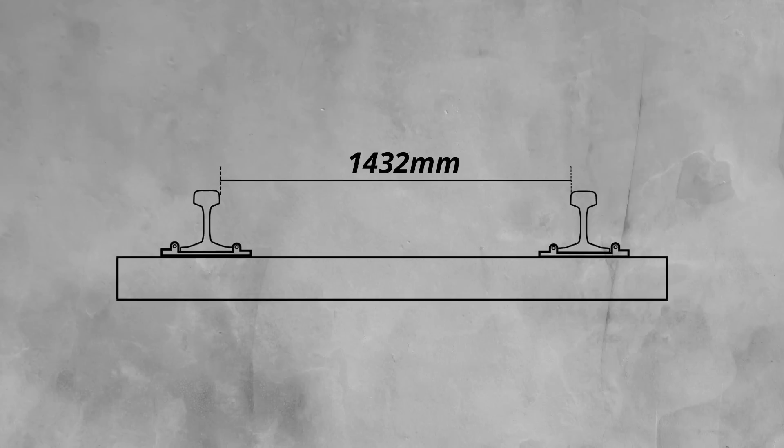The standard rail gauge in the UK is 1432mm in plain line, where the rails are inclined, and 1435mm where the rails are vertical, such as in certain types of S&C. This is also common throughout Western Europe and the US.

Measurements for gauge, whether taken by hand using track gauges or by train-borne measuring equipment, are taken at 14mm below the crown of the railhead.

So why is correct track gauge important? First and foremost, correct gauge is important to ensure trains stay on the tracks. Both tight, when the rails are too close together, and wide gauge can cause trains to derail. For wide gauge, the wheel will simply fall off the rails.

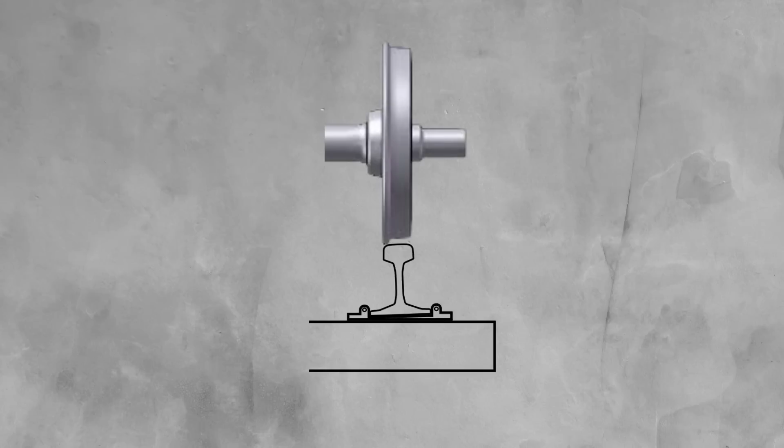When the gauge is too tight, it can cause a number of issues. These include wheel flange climbing, where the flange starts to rub against the rail or catches it, which can cause the train to lift and then derail.

On curves, trains tend to move slightly off centre, so that the wheel's semi-conical shape can allow the outer wheel to travel the longer distance. Tight gauge stops this from occurring, causing instability and possibly overturning the train.

Increased lateral forces, caused by the restriction on the train's natural movement by tight gauge, also leads to increased wear on components, such as the rails. This can weaken them over time, leading to failures.

Aside from the immediate concerns of keeping the trains on the rails, correct track gauge also contributes to the stability of the train. Track geometry is designed with correct gauge in mind, so for optimal rail-wheel interface, the gauge needs to be correct. This gives trains, particularly at high speed travelling around curves, the optimum interaction between the rail and the wheel, giving the highest level of stability if the track design is correct.

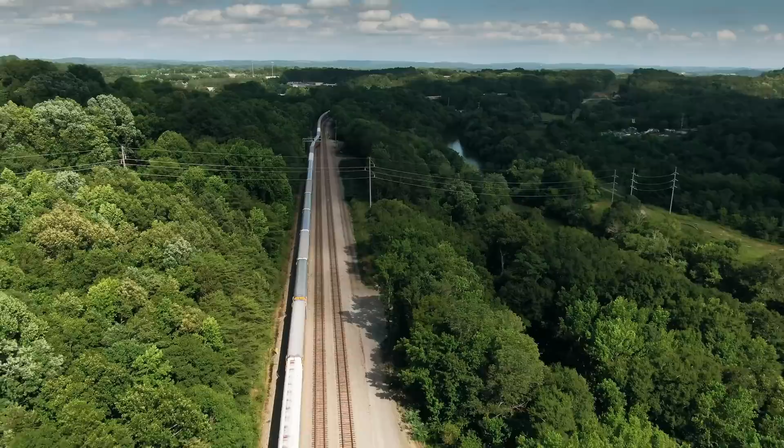This also leads on to ride quality. Similarly to track geometry, trains themselves, and importantly their suspension systems, are designed to provide a comfortable ride for passengers and to protect freight from damage. The correct track gauge is important for effective functioning of these suspension systems. Deviation from the correct track gauge can lead to discomfort for passengers, excessive vibrations, and potential damage.

There is also efficiency. As with any system, when it is operating as designed, it is at its most effective or efficient. At the correct gauge, the resistance to the movement of train wheels, known as rolling resistance, is lowest. This low level of friction reduces the energy required to move the train, thereby reducing the fuel or energy consumption of the train. In a similar vein, the track components will also be subject to less wear and tear, so less prone to failure or requiring less maintenance, which leads to reduced costs.

Gauge faults may seem more minor compared to other track faults, such as twist, but they do have a larger effect than most people appreciate.

So what causes them? Gauge faults, or gauge variation as it's sometimes known, normally have a root cause in the failure of a component. Top of the list are fastenings, base plates or screws. The main function of these components is to maintain the gauge, so naturally, when they stop functioning correctly, the gauge deteriorates. The types of failure tend to be grouped depending on the sleeper type.

On wooden sleepers, the screws securing the base plates to the sleeper are a particular weak point.

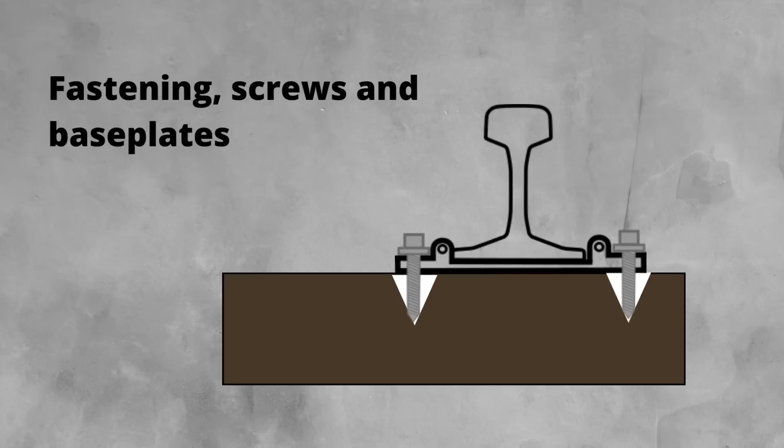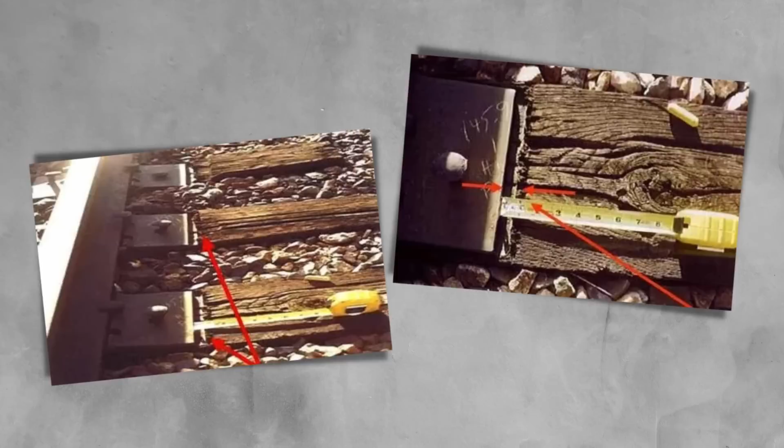The lateral forces of passing trains can cause these holes to elongate, allowing the base plate to move or shuffle. This can be visible on the sleeper, as the base plate movement wears on the wood. The screws can also shear, a more likely failure on hardwood sleepers, given the tougher material doesn't allow the holes to deform. This can be a real issue because to the track patroller walking through, it might not be obvious that there is an issue.

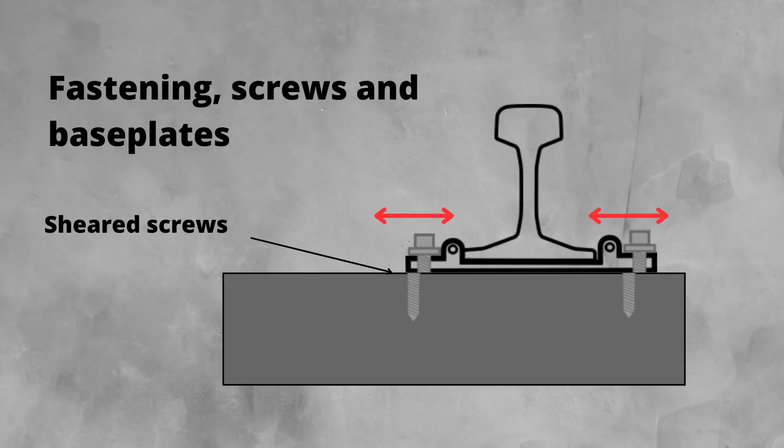It would only be apparent when a train passes, when the track system is under load. This is known as a dynamic gauge fault, where the train's force spreads the rails. A static fault can be seen and measured without the presence of a train.

Sleepers that have failed or are rotten can also be the cause of the issue, as they are unable to restrain the base plate and thus the rail. Typically, a number of consecutive sleepers need to be affected to allow gauge variation to occur.

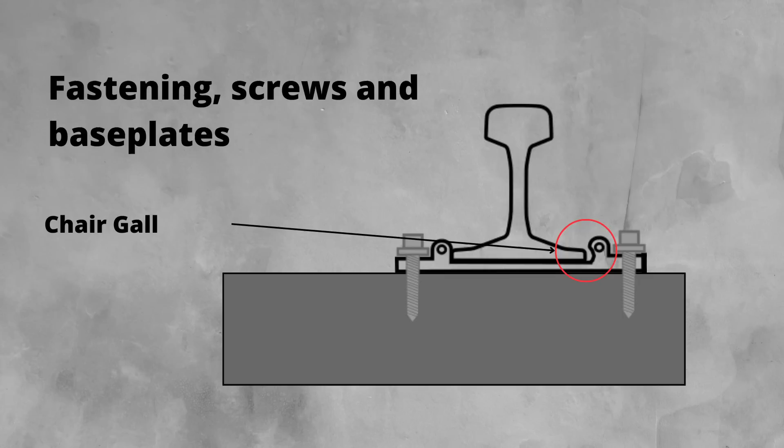Moving above the sleeper to the base plate, wear in this area can create what is known as chair gall. This is when the inside of the base plate surface next to the rail becomes worn, normally from movement. The additional space between the rail and the base plate allows the rail to move outward, increasing the gauge. Left unchecked, it can also lead to the housing being worn right through.

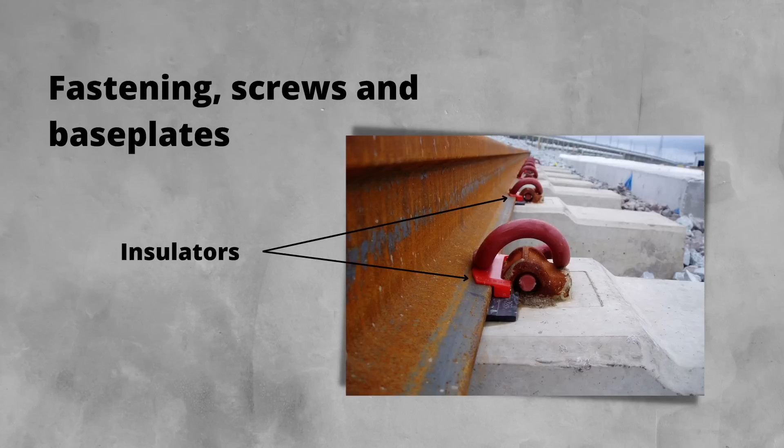Next, we get onto clips and insulators. Again, if these components become worn or are not in place, the rail can move outwards. This is most commonly found on tight radius curves where the lateral forces are high.

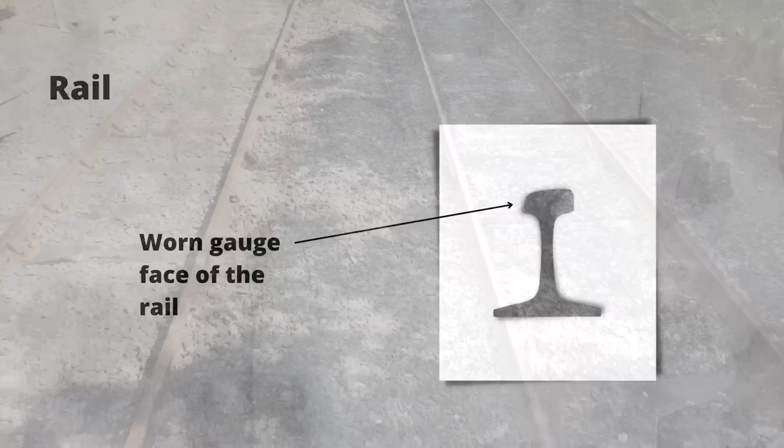Lastly, we get to the rail itself. We have said that gauge is measured from the running face of the rail. Well, if that is worn, naturally the gauge increases. Conversely, if lipping is present, it decreases the gauge. Wear on the rail face is a more common issue, known as side wear. This changes the profile of the rail and can only be removed by changing the rail. It is again most likely to occur on tight or incorrectly canted curves.

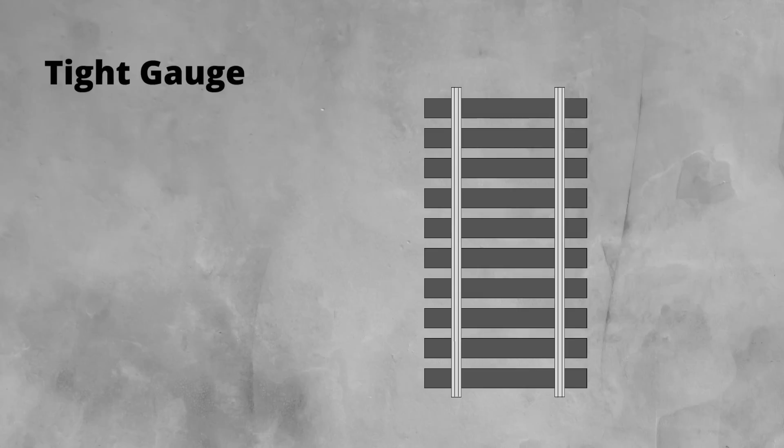We've spoken a lot about wide gauge, the more common gauge fault to find, but how can tight gauge be caused? Firstly, incorrect installation of base plates on timber track, simply putting them a few millimetres too close together. This could happen while re-drilling base plates in an effort to treat a wide gauge fault.

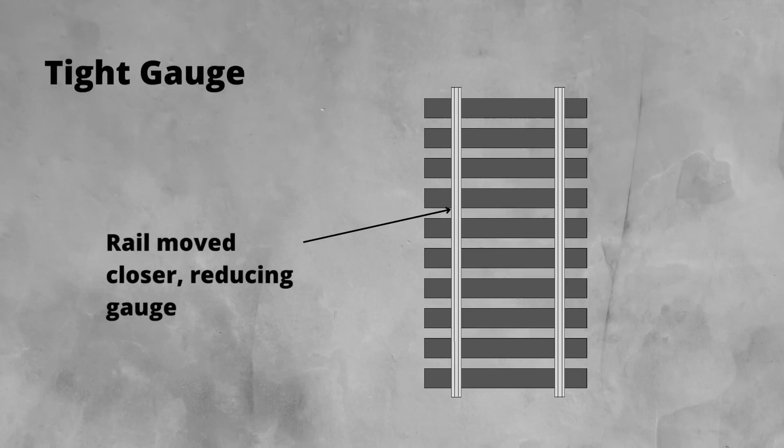Similarly, if a wide gauge fault has been corrected by moving the base plates, but side wear is present, if the rail is replaced later and the gauge isn't checked, a similar issue can occur. Another failure is sleepers out of square. If a sleeper is not at 90 degrees, as it should be, it naturally pulls the rails closer together. This can happen if the rails have different stresses, causing a different amount of thermal expansion in each rail.

So what can be done about a gauge fault? As we have seen, most gauge faults are caused by failed components, so replacing these components will address the issue. But this might require a specific access to the track if a large amount of work is required, or materials to be ordered and delivered to site.

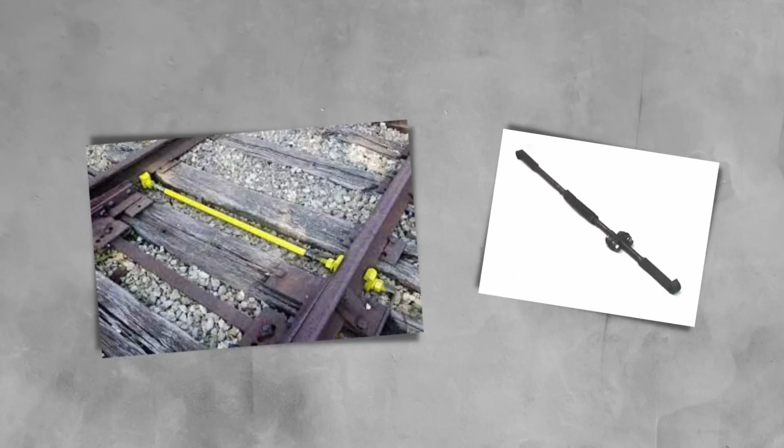So in the intervening time, if it's a wide gauge fault, tie bars can be fitted. This bar fits under the rail and holds the rails to the correct gauge, stopping further spreading. Given the forces involved, they require replacement at regular intervals, as they can stretch and deform under repeated loads.